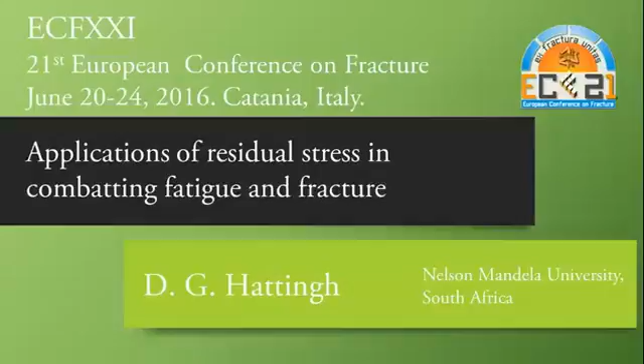I am not Neil James, as you can see, and I'm not as comfortable on stage as Neil James. Just to introduce the team, Neil James is well known in this fraternity, and he was supposed to be here, but he suffered quite a nasty heart attack a few weeks ago. He's bound to his home for the next few weeks, and hopefully his surgery is scheduled for the 7th of July.

Myself, I'm Hattingh. I'm a mechanical engineer. My knowledge on fracture mechanics is very limited. I see myself as an application engineer, so the talk you'll see this morning is very much an applied talk, and very little high-end results.

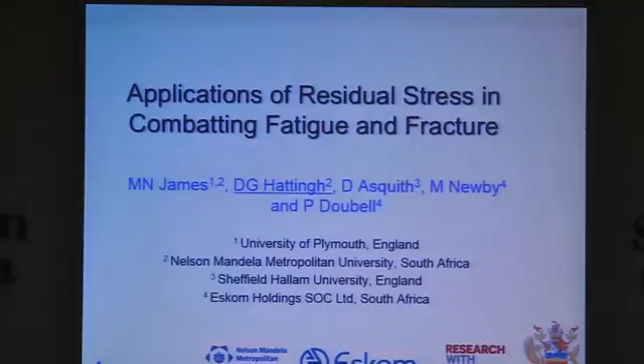Then Dave Asquith is from Sheffield, England. He's a young academic who was involved in a lot of the residual stress measurements we've done. Mark Newby is an engineer within Eskom, a power utility in South Africa, mainly a vibrations and measurement engineer, and then Philip Doubell, who is an international welding engineer.

Just to give you a brief outline of the talk. Knowledge equals safety - that is the philosophy we really use. The three questions we're trying to answer are: what knowledge is necessary to ensure safe operation? Why focus on residual stresses? And how does knowledge of residual stresses and their magnitude assist in combating fatigue and fracture?

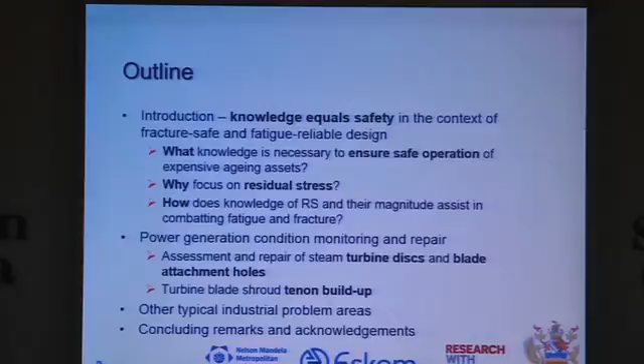Most of the work I'm going to present this morning is related to the power industry. I come from a developing country, South Africa, and we've got a major problem with power shortage. We can blame a lot of people for that - politicians, finance ministers, whatever the case may be - but at the end of the day, we as engineers have to solve this problem.

27% of our running plant currently is older than 40 years. That sounds pretty bad, but if you look at America, it's 28%, so it's not that bad. If you look at the big blue area, the 20 to 40 year area, that's 66%. This is where we really now have to think on our feet, trying to keep turbines, generators alive, and the steam side of our industry.

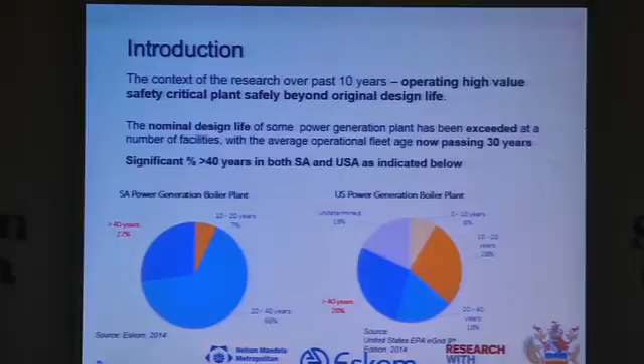So it presented some unique challenges, but also some unique opportunities. Hopefully through this talk you'll see how we took knowledge generated a few years ago to assist us to make quick solutions. This is the type of thing we want to avoid.

This is an explosion or failure of a 600 megawatt steam generator, still within design life. Failure of a fir tree root - you drop a 21 kilogram blade at 3000 RPM, and it destroys your whole generator and unit. Total damage, about 100 million euro.

Everybody's upset about that, but if you look deeper at what's happening in the rest of the world around turbine failures, you'll find that over $1 billion per annum is related to turbine failures. So it really makes the work we do on turbines and residual stresses to prevent fracture very relevant.

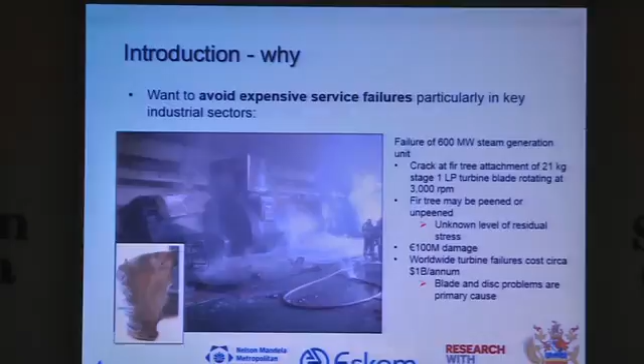Trying to set the scene, and in the next few slides you'll see Neil James' hand in it. The main driver, I always say, is cost. To replace a 600 megawatt unit costs $2 billion.

It's a lot of money in a developing country. In most cases, we cannot afford it. We're going to have to come up with other ways to do it.

One third of our generating capacity in the world is 30 years and older, and we have to take cognizance of that. I don't know how many of you are aware of what's happening in your power generation industry, but certainly keep an eye on that. Major overhauls and refits are an inevitable component of life extension.

This is where your research data - fracture research, fatigue research - helps us as engineers make decisions on how to solve these problems. Now, the current group of authors you've seen, for the past 10 years, it's not something that happened overnight.

For the past 10 years, we've worked quite actively on repairing and finding repair techniques, and analyzing what we do to structures when we repair them. We've settled on using a friction processing repair technique.

So the two parts that are important for us are sampling - and when I say sampling, I'm not talking about surface sampling, I'm talking about invasive sampling. I'll show you some case studies around that, because we need that information.

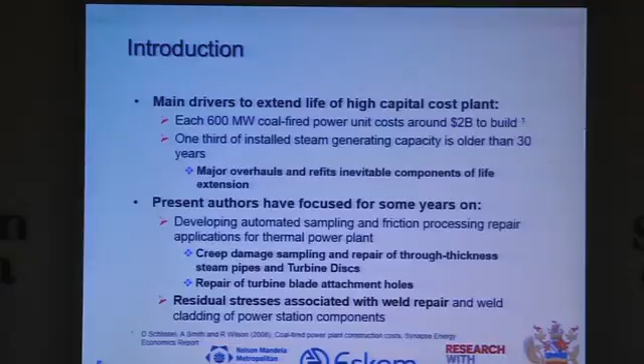The next point is, once you do invasive sampling, you need to repair, and I will cover some of those issues. Residual stress, weld repair and cladding of power stations is a big focus of our research work.

Achieving the required extended service life for expensive industrial components is what drives us. We need appropriate fracture safe and fatigue reliable design philosophies. We have to have in-service condition monitoring, because as soon as you make modifications, your condition monitoring ability must go to the next level. Fracture mechanics-based assessment to detect defects and understand their influence.

Weld repair is a big part that our life goes around. When you do a weld repair, you upset the structure, you induce unwanted residual stresses, and you have to know what you do. Assessment of residual stress levels is key. We know that manufacturing processes induce high levels of residual stresses. We have to control that.

In most cases the effects of residual stresses is overlooked by engineer designers, and we only really discover that a bit later in our life when we start having failures. Remember, we're working with components designed and delivered in the 1970s. The technology available to those design engineers was not at the same level as it is today. Magnitude and distribution of residual stresses, and the modification they undergo, is important to us.

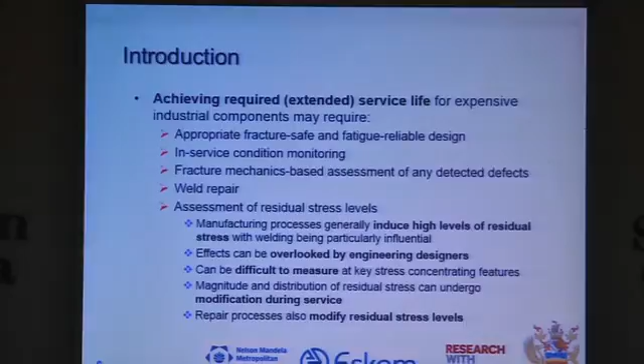Residual stresses can make life prediction complex. This is something I've learned over the last few years - if you look at codes, welding codes, and want them to guide you around how to work with residual stresses, they're very generalized. You need to really do a lot of experimental work to get an understanding of your residual stresses.

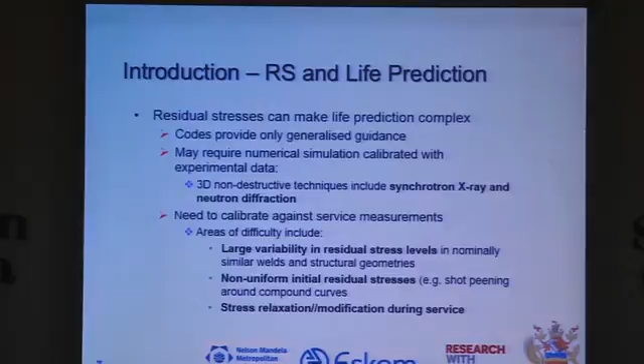Numerical simulation needs to be calibrated. Luckily now we've got abilities around synchrotron and neutron diffraction where we can measure quite large components, and I think Professor Withers is somewhere in the audience. He did a lot of work getting engineers to understand how to use neutrons and synchrotrons to measure residual stresses. We've really hopped onto that bandwagon, and it helped us a lot, as you will see in the case studies. The rest you can catch up on in the paper.

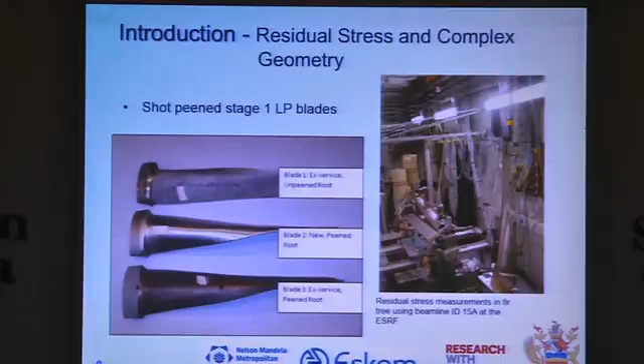Going back to the failure I showed you earlier, it was caused by a fatigue crack through a fir tree. We did extensive work on ID15A at the ESRF, looking at unpeened roots, new peened roots, and ex-service peened roots. The final finding was that the peening process, although we all know peening introduces compressive residual stress that will prevent the crack from forming, when you do peening of a complex shape it's not that easy. The coverage was uneven within the complex parts of the fir tree, and that slight miss at one place caused a fatigue crack and a 600 million euro failure.

Residual stress and condition monitoring is an integral part of fracture mechanics based life assessment. This next point is very important: it supports run, repair, replace decisions. That is the decision engineers sitting in power plants have to make on a daily basis. They haven't got the luxury of running to a lab for 3 months to do experiments. We have to have valid information and tests to be able to make a decision on repair or replace.

Now, if you want to replace a turbine, it's not that easy. It's an easy decision to make, but usually there's a 2 to 5 year waiting time for a new turbine. Sometimes if you've got a power utility that's in trouble, you cannot do it - you have to think of other ways to extend the life of that. I'm not going to go through the rest.

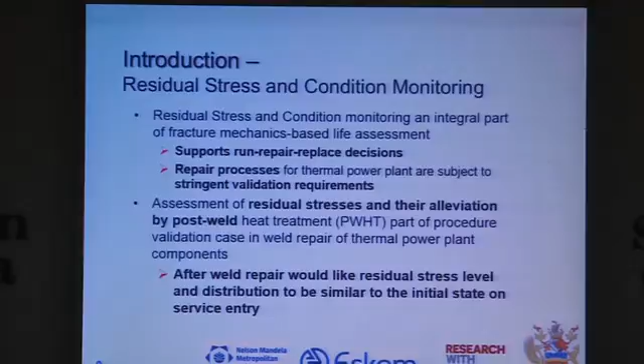The first case study I've got here for you is a repair of finger-pinned blade attachment holes. We detected cracks on these discs, did our fracture mechanics calculations, did our 3D FEA work, and saw that the cracks are not critical, but they will be critical at the next shutdown. So you're sitting with a crack that you can tolerate, but within a few months' time you're going to need a solution on the table. The photographs at the bottom show you the complexity of the curvature and attachment of these blades.

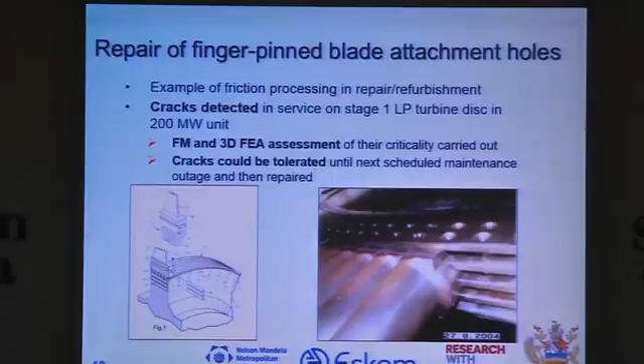So what is the problem? These are the three problems you sit with in this typical turbine: incorrectly drilled or spaced holes, hole ovality, and the last one is cracks. These cracks could be fatigue or stress corrosion induced cracks.

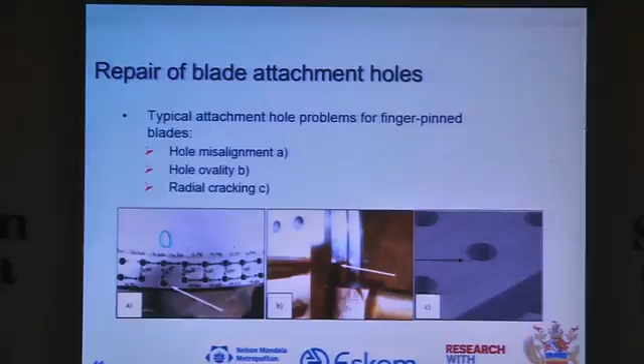So we come up with a proposed repair procedure. Conventional welding cannot be used, so we make use of friction hydropillar welding. In the first picture we drill out the damage, then we put in the backing plate, the yellow backing plate, and we then drill down in the backing plate.

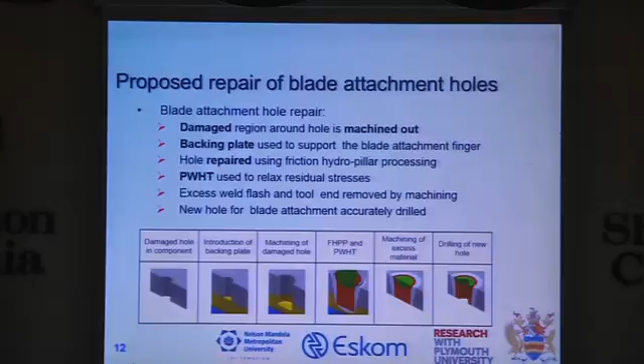The reason we're going down into the backing plate is that the place for introducing defects within the process is at the interface between the consumable tool and the backing plate. So we take that area away. We do the weld, do your post-weld heat treatment, machine excess material away, and drill the hole. This is the proposed solution that we came up with.

You have to take into consideration that you've got a complex shape, so you need to get to the finger in the middle as well. So we decided we'll drill out the hole at the top slightly bigger, work through, repair the hole in the middle, and then repair the hole on the outside. Repair that one, and then you can just re-drill that hole there.

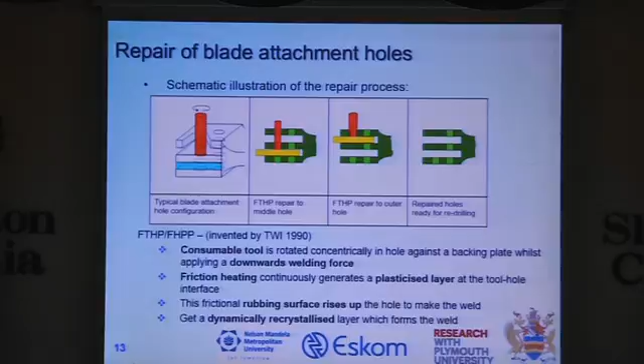The process we use is based on friction hydropillar processing, a process that was invented by TWI. Right, so it's not that simple - there are a number of issues you have to consider.

Number one, you have to develop and optimize the welding process. It's not something that just happens - we've done at least 200 welds before we actually had a welding process with parameters that gave the right weld quality. The nice thing about this process is it's an automated weld, so consistency is very good.

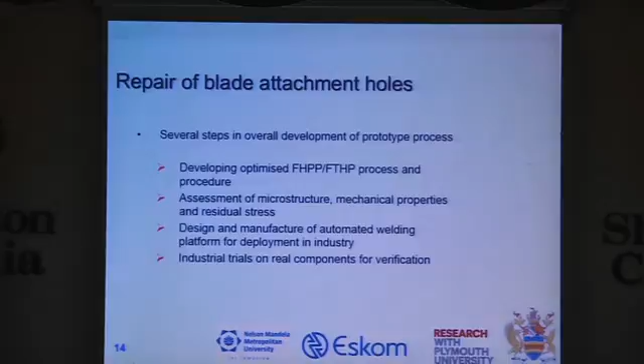Assess the microstructure, mechanical properties, and the residual stresses - I'll give you an idea how we've done that. Then design and manufacture your platforms and do industrial trials. Only then can you implement the process as a solution within the industry.

This is what we've done with the residual stress part. We've welded 5 samples, 3 of them as welded. The first one we cut up into D0 samples, the second one we left undrilled, the third one we drilled an 8mm hole through. And then we had 2 samples that we did post-weld heat treatment on, one drilled, one undrilled.

Remember, you've got a week of beam time, so you have to get all of this data through. You'd rather take fewer samples than more, but make sure that your data is valid.

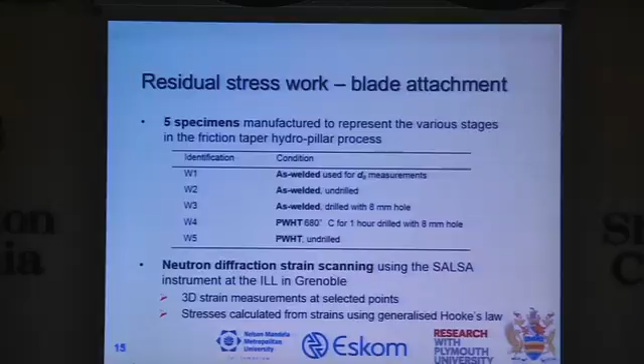Or if you go to SALSA, the instrument at the ILL in Grenoble, and you make your measurements - the reason I put this slide in is you have to take great care making sure the samples you take to the ILL are representative of what's going to happen in real life. If you miss this point, you're going to sit with data that's misaligned with what's happening in the field, and you've not solved the problem with respect to your repair.

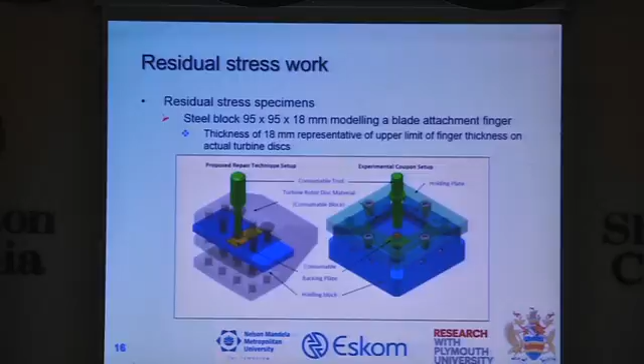This is the welded samples we've made, and again the first step is your sacrificial backing plate that we put in. Then your sample goes in, automated welding process - so the weld there is a program weld. By this stage you've sorted it out, it's now just pushing a button, the weld gets made, and then finally you've got your weld.

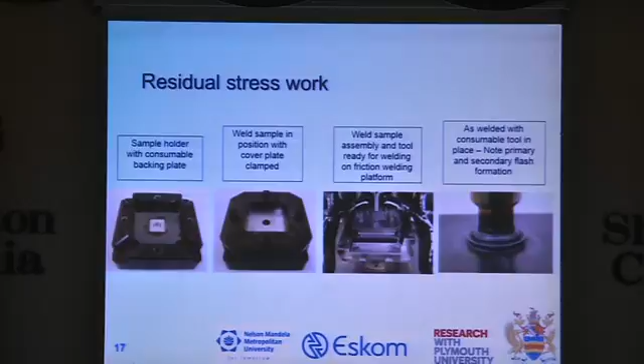That's the matrix we've used to measure - I'm not going to go through that. Just simple 3 levels of stresses that you quantify.

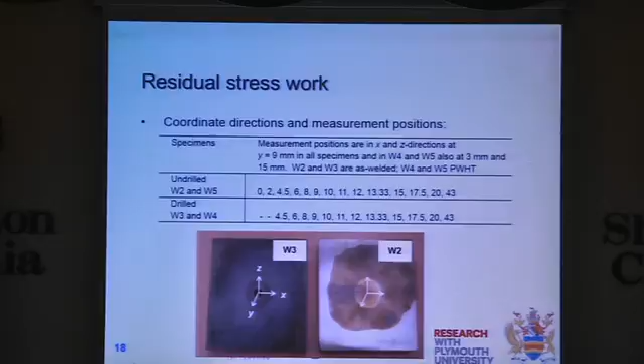In this graph, what I'm showing you is 2 sets of welds, the W2 sample and the W5 sample. The W2 sample was as welded, and the W5 sample was as welded plus post-weld heat treatment. The positive thing is you can see as welded, we sit with 500 MPa tensile residual stresses at about 15-16 millimeters away from the center of the hole, whereas after heat treatment you reduce that considerably to about 100 MPa.

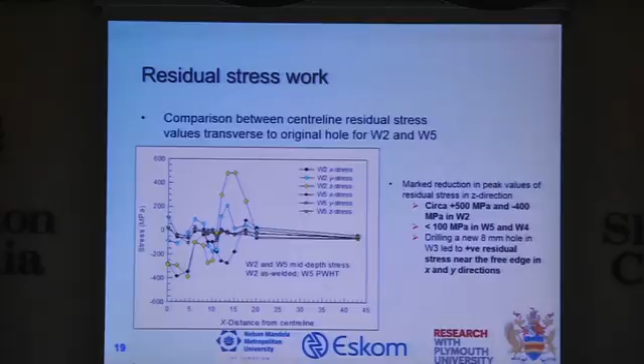So now we're happy that we can manage our residual stresses, and we can start implementing the process in the power station onto the turbine. Alright, so in summary, what have we achieved there?

From peak tensile values in the Z direction of about 500, we went to very low values. By drilling the hole, once you've drilled the hole, you end up with this positive residual stress. Tensile residual stress is on the inside of the hole, but they're of the magnitude of about 40 MPa. So you have to realize you sit there with the tensile residual stress that you have to deal with in some other way.

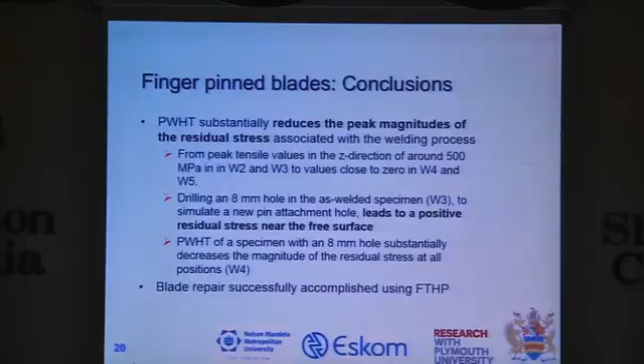Then post-weld treatment of the specimens decreases the magnitude of residual stresses at all positions. Blade repair successfully accomplished.

The next case study is one that is taking off quite exponentially at the moment. Again, if I can get a piece of material, the core that you see there is about 25 millimeters long, 8 millimeters in diameter, and it comes out of a steam line 40 millimeters thick. So I've got a piece of material that has 50 years or 30 years of history inside it, and it can tell me a story.

But by taking that out and getting that history, I need to repair the hole, and that's what this is about. So what can we get from that?

We can get macro, micro structural information. We can get tensile, static strength information. We do a lot of small punch creep testing currently for industry, on an 8 millimeter disc, half a millimeter thick, that we cut out of this at different places. We do a lot of fracture toughness testing using inverse finite element analysis and small punch tests. That's just another hour talk for another day.

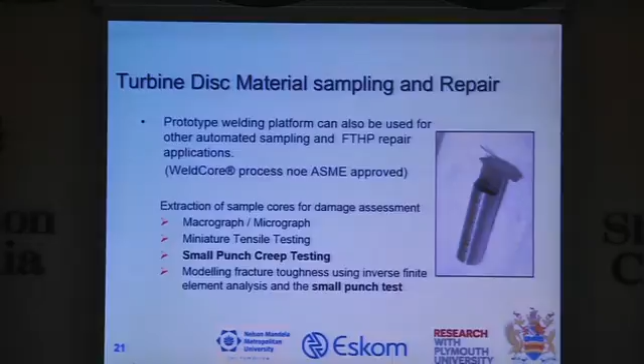Right, the WeldCore process that we've developed - for this process, I think it's important to note, we've got an ASME approval. Our generation petrochemical people will not allow you to touch the equipment if your process doesn't have ASME approval. So we've got that ASME approval, and there's the code case number if you want to use it.

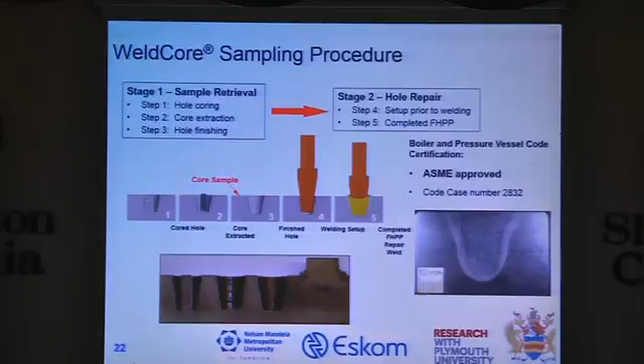But simply, what do we do? We core, take a core out. That's really the piece we're after, and then we repair it by a solid state welding process, not a conventional welding process. For the sake of time, I'm going to go a bit quicker.

In South Africa, 5 years ago, 10 turbines at end of life had to be replaced. There's no way we can take 10 turbines out of service. The German manufacturer indicated the area of concern is on the pull face, and all the models showed end of life, severe creep damage. And you have to believe this, unless you can show it is not the case.

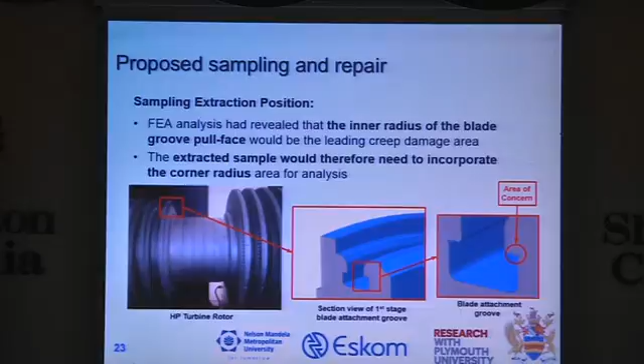So what we've done is developed a process whereby we say that we're confident with our friction hydropillar repair process. We now need to convince people that we can take a sample out and repair it safely.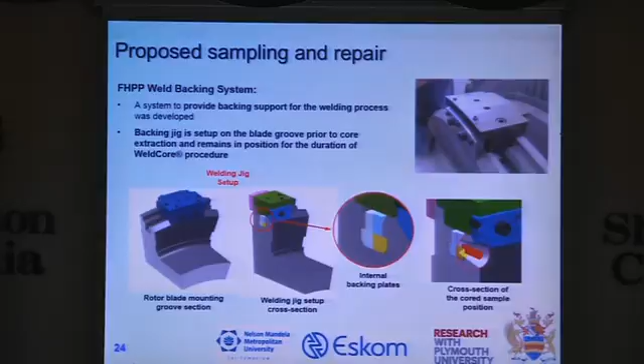So if you look at what we've done here, we've developed some backing inserts that go into the T-slot there, and that little red piece of material sitting there. Because it's a through hole here and we need backing for our process, we have to put backing in. All of that is sacrificial, and it can be machined away afterwards.

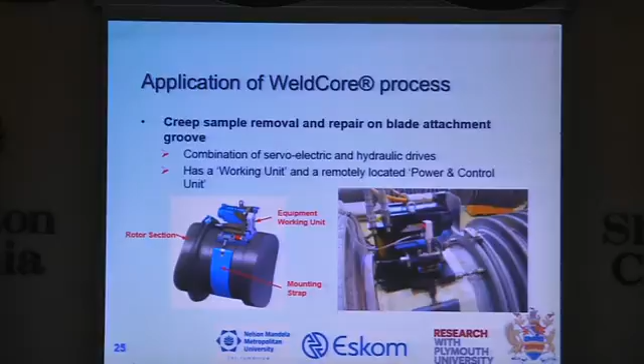Develop your platform, put it in place, and not much more to it. This is a coring stage, you get the core out. Now from taking the core out of the turbine, within 4 to 5 hours, we have the answer from the metallurgist saying this is the creep damage - the turbine must be reworked, the turbine must be scrapped, or it can go back into service.

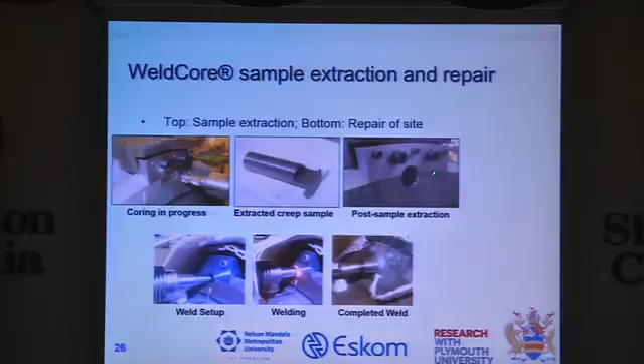So the total process, in a question of 2 days, including the longest parts which are your pre and post-weld treatment - within 2 days we can get a decision on whether the turbine can go back into service or not. That's the extracted hole, and what you're seeing here is the repair process.

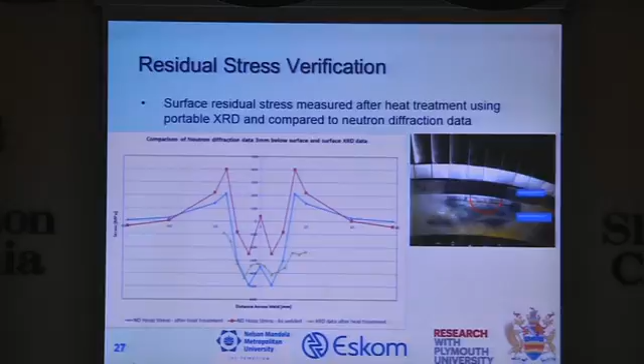Interesting here is the residual stresses that we've done. Because we're very careful, we did residual stresses on the repair side - blades put back, repair side - we did residual stresses by XRD on the surface there. Now look at the neutron data, the red and the blue, and then the green line here is our XRD data. That gives you confidence. You've now done a repair, and your residual stresses on the surface is more or less what you saw in your experimental work and your samples, and now confidence is high, and you carry on.

So, sample extracted provided crucial creep condition information, direct measurement of creep damage and other material properties, with calibration of FEA models. That is very important. All that creep data that we got now, that actual creep data, we could send back to the OEM and say, right, go and recalibrate your models whereby you predict the creep life.

So that is very important. This has now become a very important tool for us in managing the remnant life of our turbine fleet within some of the power stations in South Africa. Currently, we've applied the process to 5 identical turbines, 5 out of 10, 4 out of the 5 returned to service.

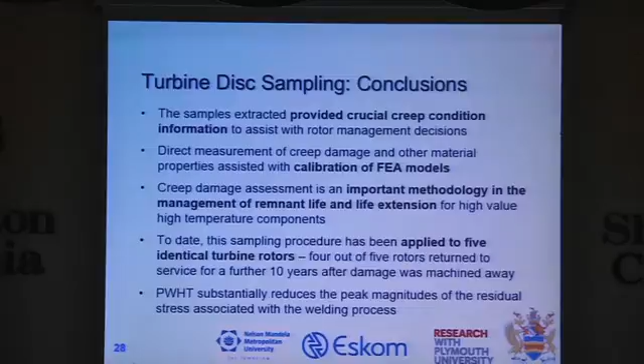Right, the last one I'm going to talk to you about is laser weld build-up of turbine blade shroud tenons. I was not involved with this project, so I'm a bit cold here, but I think the next slide shows you what happens.

You've got turbine blades and they've got these tenons. They put a shroud over, then they rivet these tenons over. So when you have to do blade inspection occasionally, you have to grind the rivets off, take the blades out, and scrap the blades. And you cannot put them back because the tenon is now too small.

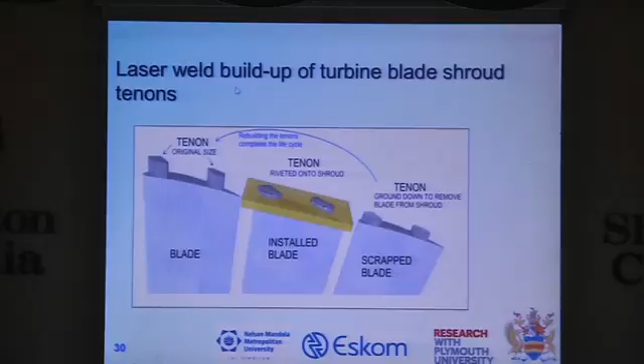What we've done in this case is, and that part you can go and read in the paper for the sake of time, it's just the laser welding specifications. We made a number of samples to take to the ILL.

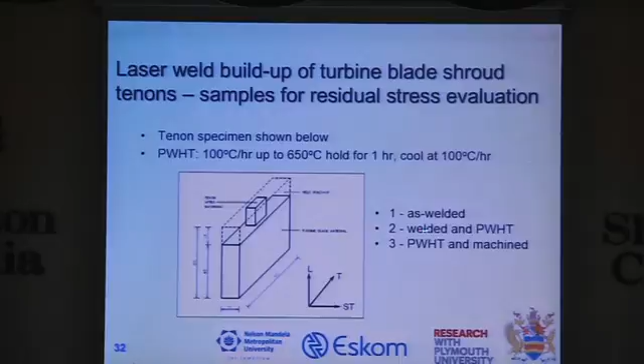Laser welded tenons onto it. We had a sample as welded, a post-weld heat treatment sample, and a post-weld heat treatment and machined sample, and we quantified the residual stresses on that.

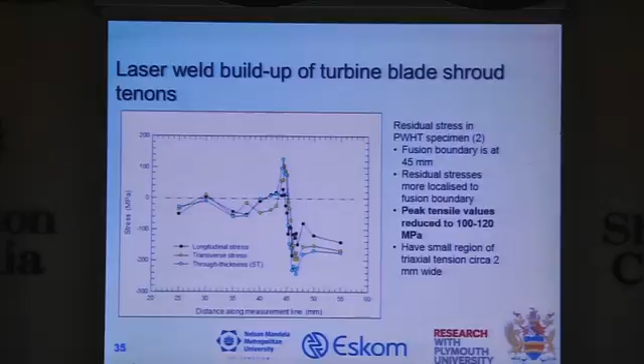However, if you heat treat these samples properly, you can get the residual stresses normalized in a certain way. And again, now with the confidence that you've got a process that is sound, homogeneous, and of which the residual stresses are understood well, you can apply it.

So again, this we have not applied in industry, but when times arrive, we are ready now to implement it. Some case studies that Prof. James put in here.

I'm going to really just skip them because of time, but the one I think is important is the specific one where when you machine casting, you get distortion, and that distortion results in fretting fatigue. It's a residual stress issue.

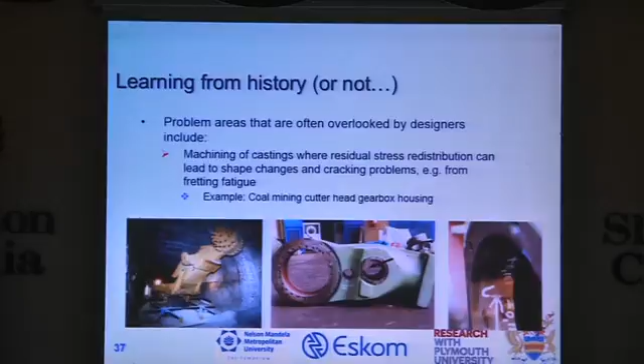This embrittlement here with flame cutting, incorrect welding processes, it's a residual stress phenomenon. This is a 14-foot diameter cast girth gear that was weld repaired.

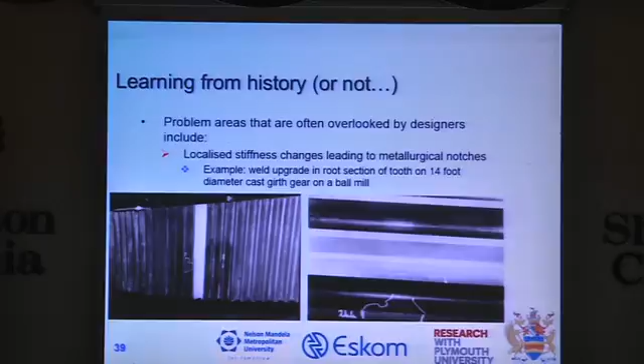The fatigue crack grew slightly away from the weld repair, because it's not the weld repair, but your support ligament is affected by the residual stresses. You can read the details on that in the paper.

In conclusion, sampling and repair is a cost-effective part of condition monitoring for thermal power plant. Automated friction taper hydro pillar process is a powerful addition to refurbishment and life extension procedures, giving lower values of residual stresses, fewer defects, and potential for development of a fully automated technique for bespoke repair procedures at lower cost.

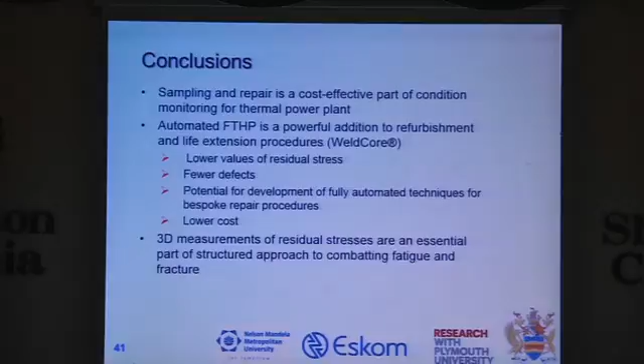3D measurements of residual stresses are an essential part of a structured approach to combating fatigue and fracture, and it is really easy to get large samples into places like the ILL. Learning from history is particularly important, paying attention to possible causes of residual stresses.

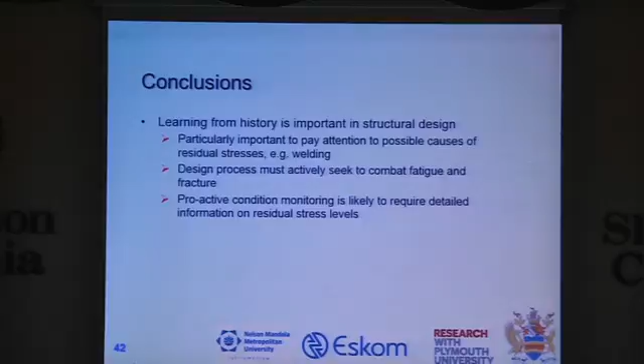The design process must actively seek to combat fatigue and fracture. Proactive condition monitoring is likely to require detailed information on residual stress levels. And finally, many industrial cracking problems in large and expensive structures arise from residual stress issues that could be avoided through knowledge of the factors that influence fatigue.

Make sure you get underneath that. Understanding the effects of welding on alloys is critical. Full sharing of relevant information between all parties in a contract is needed. We tend to underestimate how important the paperwork is, and then the realization that techniques to minimize residual stresses and defects should be consciously adopted.

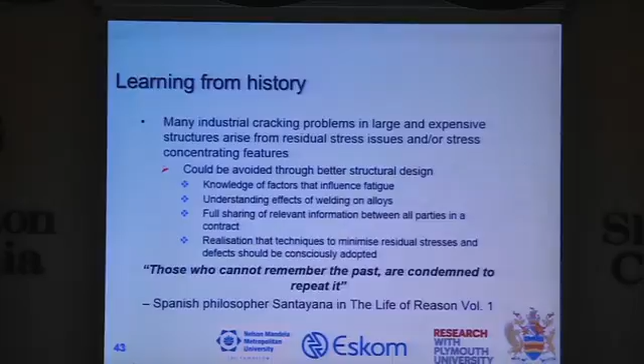And then the last quote is, those who cannot remember the past are condemned to repeat it. That was said by some Spanish philosopher.